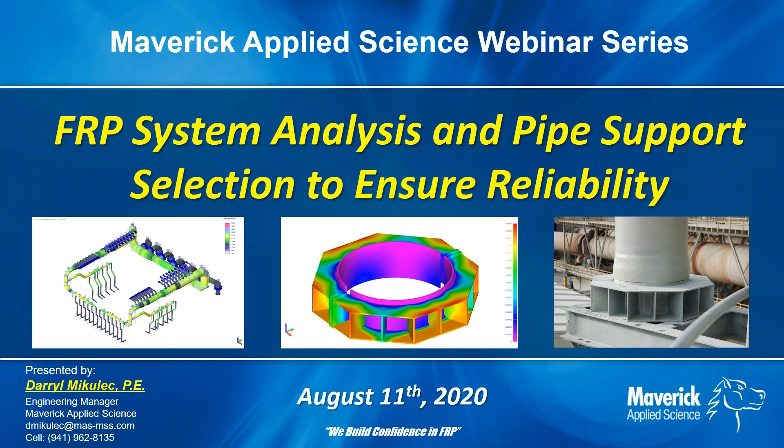Today's topic is a little more technical. We're going to talk about FRP system analysis and pipe support selection to ensure reliability. So let's get started.

I think you should know a little about me so you understand where I come from and some of my credentials. I've been with Maverick since 2006, going on 14 years here, and I'm now the engineering manager of Maverick.

Some of what we do at Maverick with our engineering capabilities: we do pipe stress analysis, equipment design, FEA. We develop project specifications and owner specifications specifically for non-metallics. A lot of owners don't have those in-house, so we assist with that. I also manage the pipe support division, so we have our own line of custom pipe supports specifically intended for FRP and thermoplastic piping.

Some of our other engineering responsibilities include acting as the owner's liaison. We assist with bid reviews, calculation reviews, and design reviews to make sure they meet specs and all relevant industry codes and standards. Owners don't always have those technical subject matter experts in-house, so we act as owners' representatives in those instances.

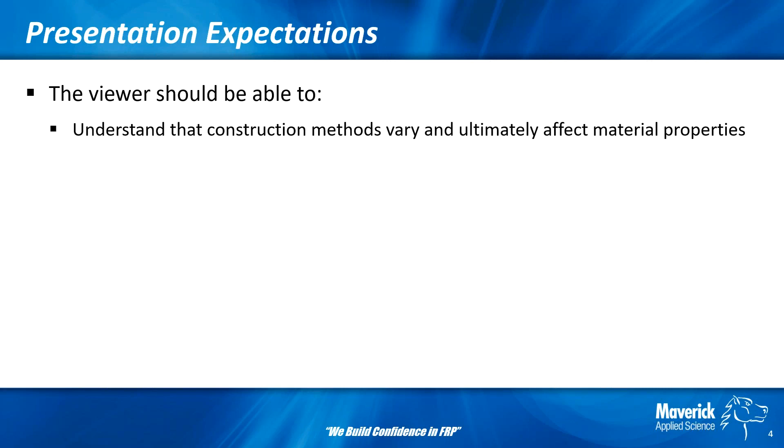I'm expecting attendees to understand that construction methods vary and ultimately affect material properties with FRP. You should know some of the primary differences between analyzing steel and FRP. I expect a fair amount of attendees here have good experience with steel, maybe not so much with FRP.

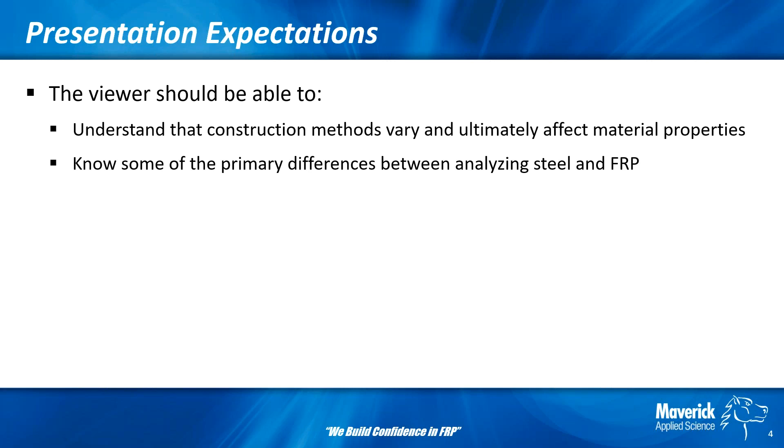You should be able to identify different analysis approaches based on what system routing you're given and what kind of design conditions you have, whether it's high temperature, low temperature, or high pressure.

You should understand some of the gaps between theory and reality. That's a very big gap. Everything looks great inside a computer, but when it's operating in real life, theory is not always reality, and the analyst is responsible for overcoming that.

Finally, you should know what separates appropriate from inappropriate supports. That'll be the end of the presentation here.

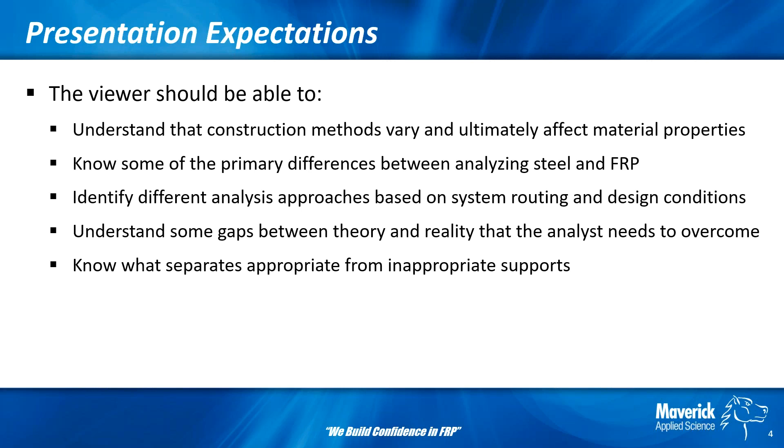Now, I do not expect to teach the attendees how to use Caesar. Caesar is a pipe stress software—basically the Cadillac, we say—so I will be referring to Caesar throughout.

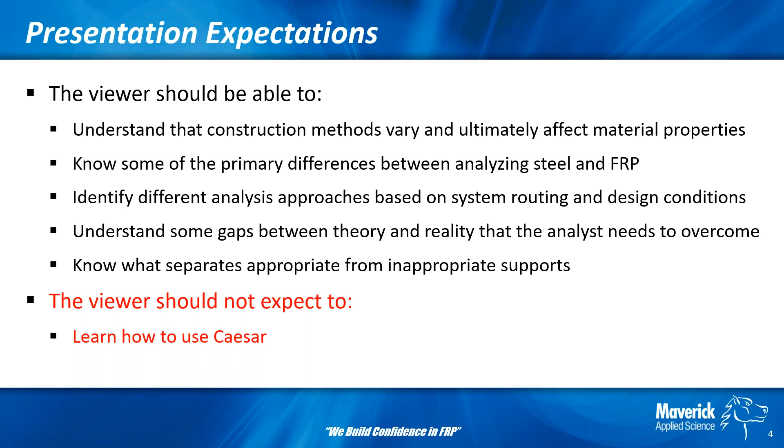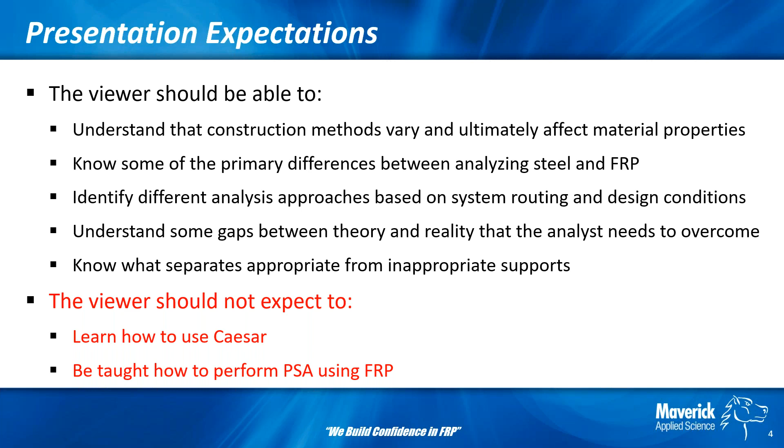I'm not going to teach you how to learn Caesar, and I'm not going to teach you how to do pipe stress for FRP. That's not the goal of this presentation. So any questions related to Caesar configurations or modeling questions specific to different pipe stress softwares, I probably won't answer those. It doesn't mean I can't talk about it offline, but it's not something I hope to educate on in this webinar.

My assumption is that most attendees know what pipe stress analysis refers to, but for those who aren't familiar, I want to establish this so we're all on the same page. Throughout the webinar, I'm going to refer to pipe stress, PSA, and Caesar interchangeably, so just understand that.

So what is pipe stress analysis? It's a calculation method to predict combined axial stresses in piping and loads on supports and equipment. It's an iterative solution technique to help optimize the most efficient pipe routing, dimensional requirements, support locations, and types. The program does not do everything for you, it's just quicker than doing it by hand like they did 50 years ago.

The analyst still needs to add all the inputs, do the routing, material properties, figure out support locations, and iterate on their own. It's still a very manual process. You don't just plug it into the computer and have it do it for you.

But why is pipe stress important? Specifically for me, and for what I'm going to talk about here, why is it needed for FRP? For FRP, it's a non-ductile failure mode. You don't have any warning. So you need to be certain of the stresses within your system, the displacements within your system, and make sure everything is properly managed.

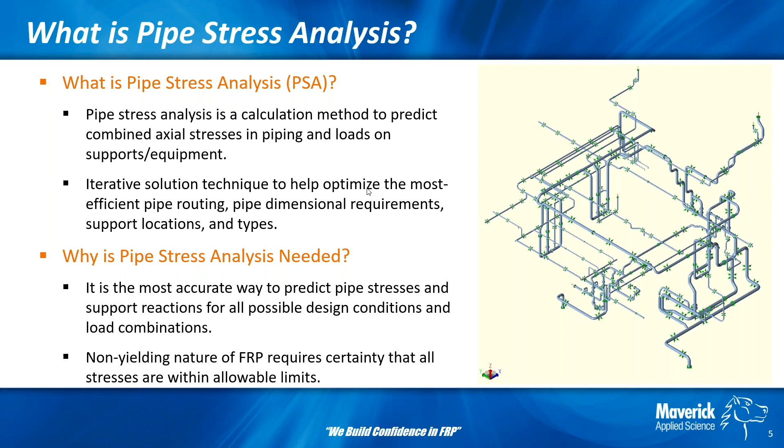So we'll first go through things to be considered. This is not a unique approach, not just FRP, but being aware of these considerations and how FRP relates to these different aspects prevents oversights from happening. You need to understand the product, the material you're inputting, the system geometry, design conditions, and finally load cases and combinations. I'm going to talk more about thermal expansion and low modulus in future slides.

As far as the material, you have to understand there are different construction methods. You can't assume one construction method or one customer's product line. Pressure ratings can be different, thicknesses can change, stiffness changes, properties change, allowable stresses change. It's not one size fits all.

With a joining method, whether it's butt wrap, socket adhesive, if you don't understand these completely, I don't have slides specifically on what these joining methods are. I'd be happy to field questions on those later or after the webinar. But the joining method matters - socket adhesive are very quick to assemble, but they're not as good in bending.

There are currently no weld efficiency factors for FRP. I can say that Maverick is currently working on it through an ASME project, but we're not there yet. So you have to understand the joint system and how that can affect the hotspots in your system.

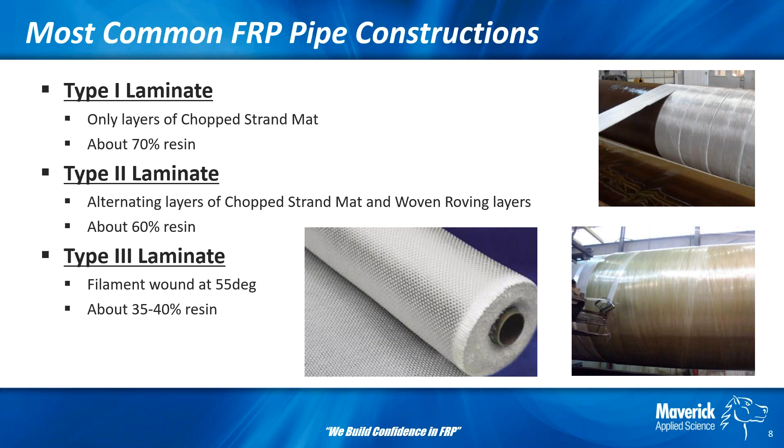And then type 3 is kind of a new designation in our new standards, but it's basically 55-degree filament wound pipe, a very optimal wind angle. This is the strongest, the most controlled, so it's about, I would say, 60 to 65% glass.

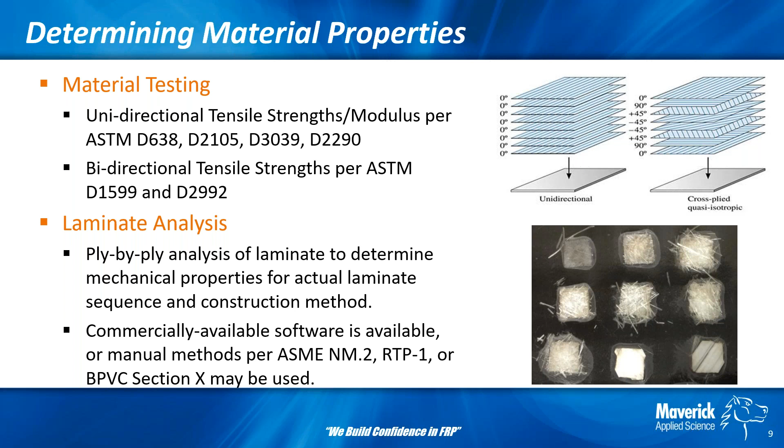You can determine each of these by two ways. Really material testing, where you just destructively test. You see the different ASTM methods displayed there. There are pros and cons to each. Or you can do theoretical laminate analysis, using commercially available software, or any real ASME FRP standard also has methods.

So in talking about tensile modulus, you see kind of the wave in this graph. The value on the far right is a Caesar default. If you don't know anything about FRP and you just know you have to analyze FRP, you might just use 3.2 million modulus. Still a lot more flexible than steel, but compare it with 8 other product lines.

If you just go online and look at different fabricators and their product lines, they advertise these different modulus values. So which one is right for your system? You can't just plug whichever one you want, because a lower modulus means it's more flexible, more forgiving, which could also be unconservative. If you use stiffer, you think you can go longer spans than you really can.

I'm going to take this time to briefly introduce NM2 and NM3 that I've been talking about previously. I'm not going to go into too deep an extent about this. There are plenty of ASME webinars out there, great webinars given by very technical people that explain it very well. It's a new pressure piping standard. We may do a webinar in the future on it as well.

Basically, what viewers need to know is there's some of the gap filled with NM2 and NM3, where there are stock properties in NM3 for FRP type 1, type 2, and type 3 laminates. So you don't have to do all of this guesswork. You can just use a stock value, but it will be conservative. And that also goes for allowable stresses too. People would be happy to note that there are allowable stresses published in NM3.

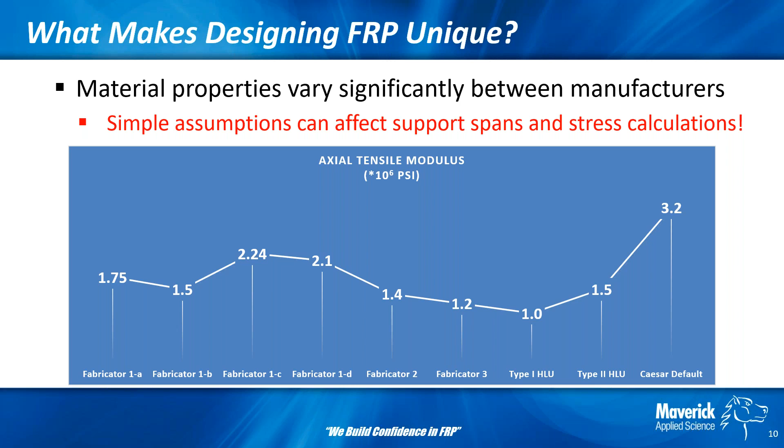Thermal expansion. This is a very big deal for FRP compared with steel. The bar on the left is for type 1. So the resin is what expands, so you'd expect type 1, with the most resin content, to expand the most. It's important to note here, you have 3 different construction methods and 3 different thermal expansion coefficients. So it's crucial to know which one you are using in your analysis.

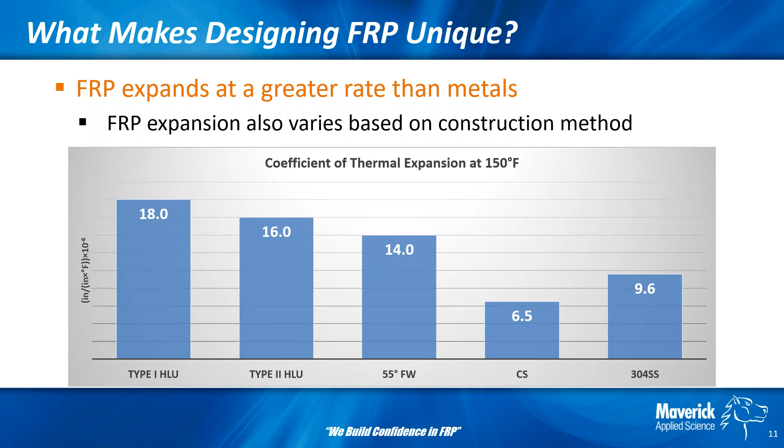The main takeaway from this is obviously the coefficient of thermal expansion changes between products for FRP, but also compared to steel. Just looking at carbon steel, you're anywhere about 2 to 3 times that of what steel is. So here's a general example. When we see systems operating at 160 in the FRP industry, to me that's an elevated temp. To somebody familiar with steel, they think 160 is pretty low.

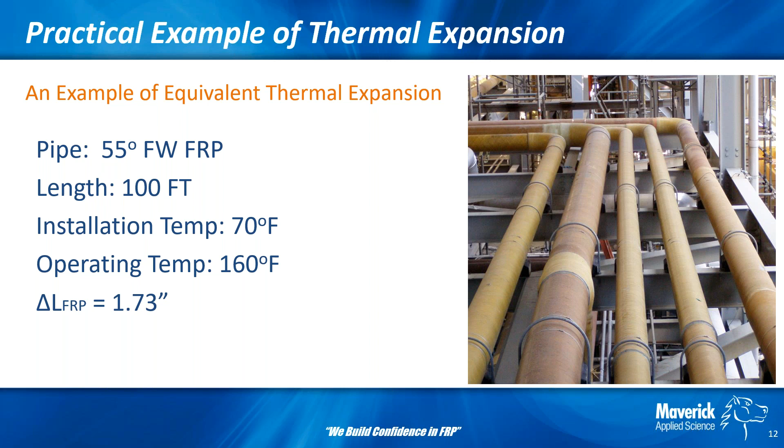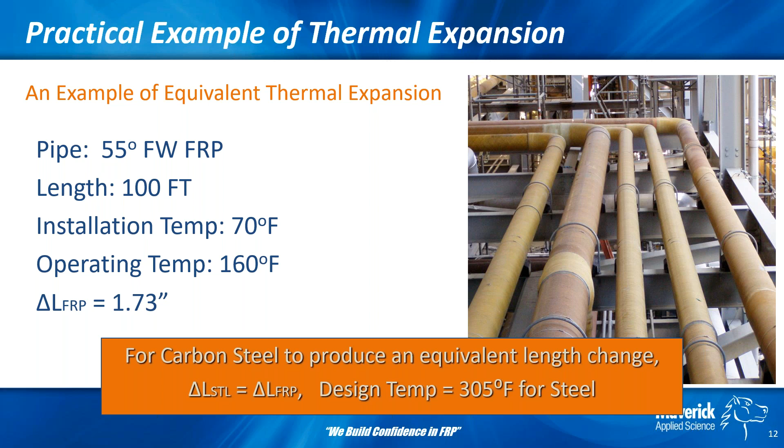So we just do a quick example here of a 100-foot length of pipe based on a delta T of 90, 70 degrees being the installation temperature. You get a growth of almost 1 3/4 inches in that system. To get 1 3/4 inches of growth for a steel system, that's the equivalent of a design temp of 305. So when you present a 305 degree Fahrenheit design temperature for steel analysts, they start to think their system is a little bit more sensitive and might need a formal stress analysis.

The other big item to talk about with FRP, and why it's crucial to analyze and understand what you're dealing with: it's a non-ductile material. You can hear that as brittle if you want. Brittle doesn't sound good, so us FRP guys say it's non-ductile. But you can see with these elongations here why it's so critical to manage stress in FRP. There's very little warning if FRP breaks. So you need to stay within that box of allowable stresses.

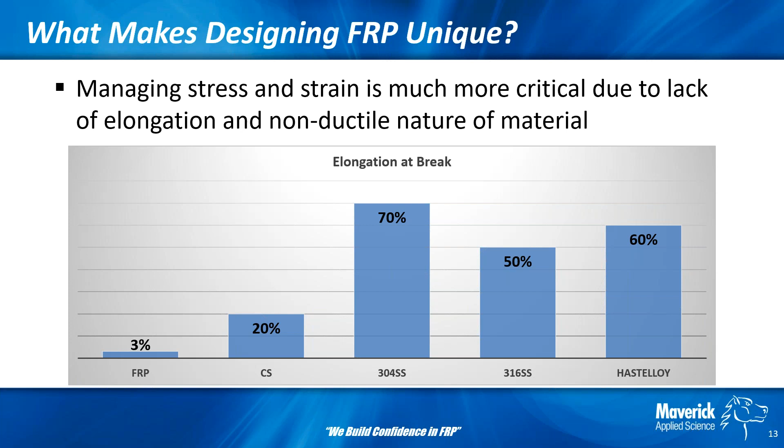It's unfortunate, and I would say it's unnecessary because we know a lot more now than we did 15, 20, 30 years ago. We have good standards in place. It's a science. But these failures happen when displacements and stresses just aren't properly managed.

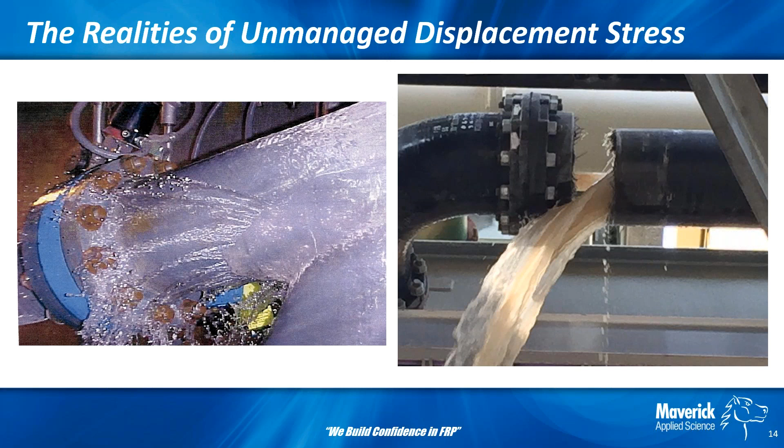Getting back into the considerations here, just talking about geometry, you need to understand the routing and how flexible it is. I have later slides comparing a few different common analysis methods for FRP systems based on how flexible they are. Where are your inline components and how heavy are they? Spans may need to be shortened if you have heavy inline equipment.

Where are existing supports? Do you know of any locations of available steel if you need additional supports? If you're replacing an FRP or a steel line with FRP, the spans are probably a little longer, so you'll need to identify intermediate steel. Take note of any stiffer locations. You want to put anchors at your stiffest locations so they can handle the reactions imposed, without flexing while operating.

And then finally, understand the connections. Are you connecting to a pump? A steel tank, an FRP tank? What are the stiffnesses of those connections? Are they rigid? If it's an FRP scrubber vessel, you might have a nozzle 50 foot in the air. If that vessel is operating at 200 F, 50 foot in the air, you can bet it's growing a fair amount, so you need to include that initial displacement as well.

The design conditions ultimately affect the complexity of the analysis. It's not just the routing. Conservative assumptions will affect the cost. It's important to note, and this is clear in NM2 now, that when you see pressure and temperature, you need to analyze at the operating pressure and temperature, not the design. It's pretty common for specs to just say 150 psi, 200 F, but that's more for pressure rating and resin selection. That is not the operating conditions.

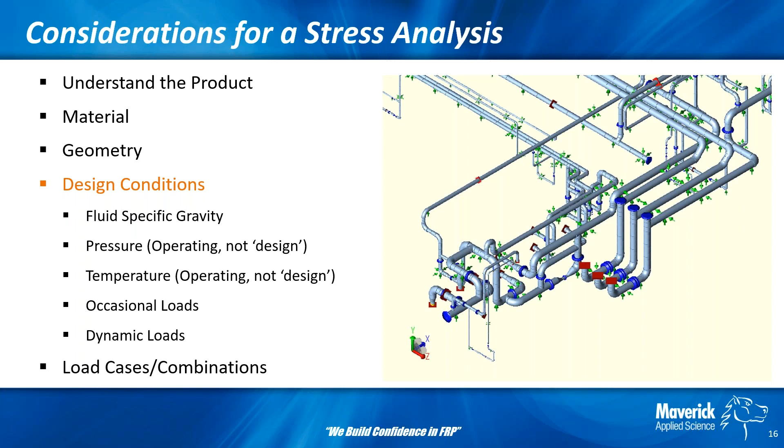I'm not going to talk too much about surge analysis and dynamics. Surge analysis is not common in our world. If you have a worst case surge event, you're going to blow up your FRP pipe. The operators need to implement engineering controls to reduce surge as much as possible. There are fundamental support layout guidelines, including anchors at each change in direction, which help to mitigate any minor surges.

What I'm showing here are recommended minimum load combinations. There are more, and it depends on what your system is. I always say dead weight plus pressure is a very good place to start. If you have elevated stress in this case, adding temperature certainly will not help your system. It's not going to make it lower stressed.

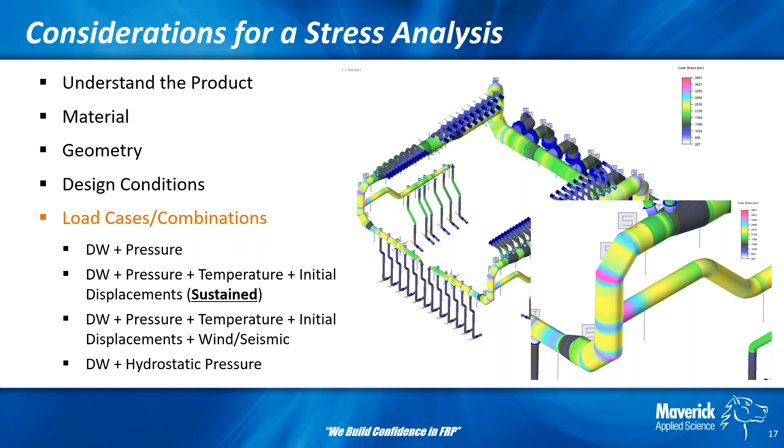So higher stress in dead weight plus pressure tells you that you might need more supports. Maybe your spans are too long. Maybe you need a support in your riser piping somewhere. It's crucial to note that temperature is a sustained case. It is not an expansion case.

The million dollar question here: what is the allowable stress for my FRP piping system? Well, I've probably said it a few times here, there's no one size fits all answer, although NM3 now provides guidance, but it will be a conservative position. I'm not going to go into all of how NM2 and NM3 define allowable stresses, but just know that there is something there. Before NM2 and NM3 existed, we would have to select our allowable stress based on construction method, it changes, type 1, 2, 3, or custom.

What is your loading? Do you have expansion joints in your systems, or is it bidirectionally loaded? That affects the stresses in the pipe. What kind of material testing has been performed? How confident are you in the ultimates? And what are the service and fluid conditions? You might be a little more concerned if you have HCl going through your pipe, or chlorine dioxide, or wet chlorine versus seawater.

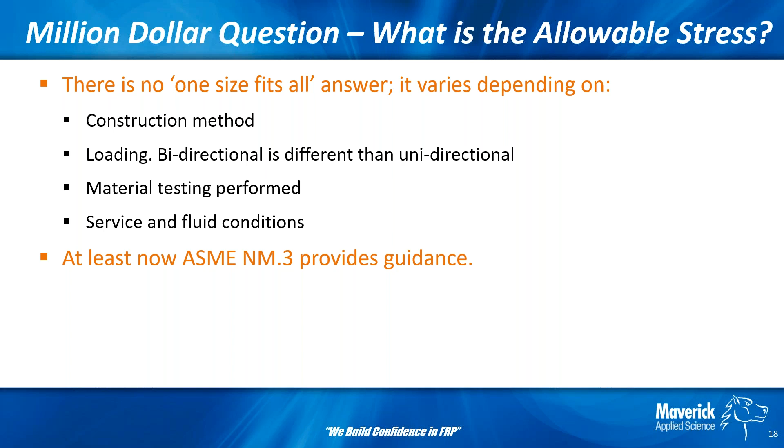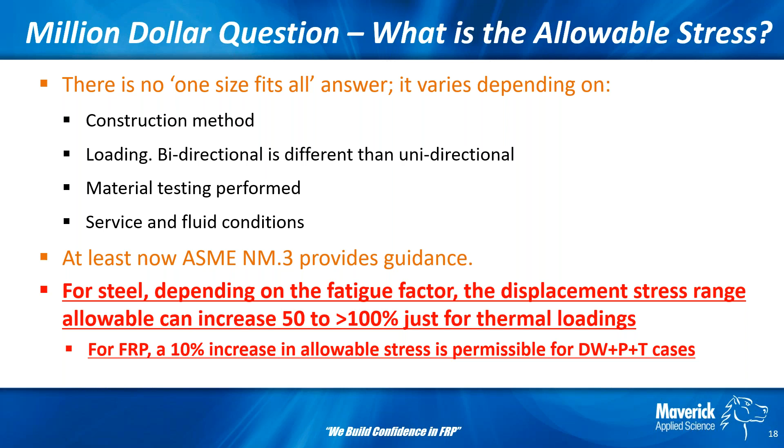For steel, however, depending on the fatigue factor, you can have a displacement stress range allowable increase of greater than 100% just for thermal loadings. For FRP, and this is only recently, before NM2 came out, it was 0. But with NM2, we have now allowed a 10% increase in allowable stress when you analyze dead weight plus pressure plus temperature. So it is not just for a thermal case, it is for what we call a sustained case of dead weight, pressure, and temperature.

Showing another graph here of the variability you'll get between different manufacturers and construction methods for ultimate strengths. It's all over the map.

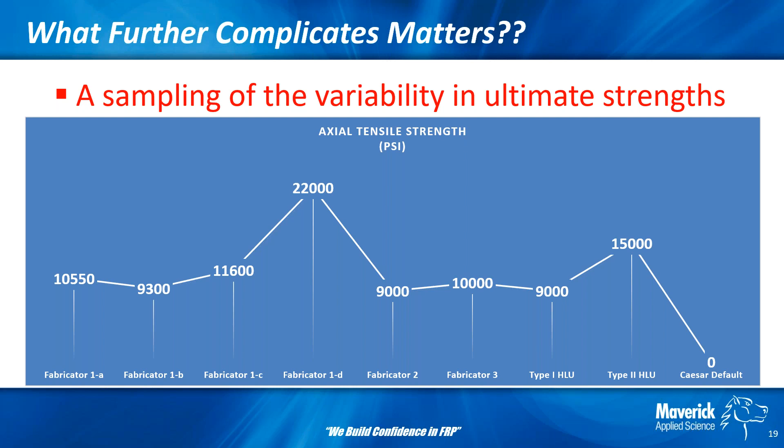Caesar, as it should, doesn't give a stock value, which I know drives a lot of you guys nuts because we get that question fairly often. I know fabricators and manufacturers get those questions as well. Now, after seeing these, how confident are you that you know what the allowable stress should be if you're not familiar with each of these products?

Well, this is what can happen. If you overestimate the allowable because of unknown product, you could have a stiffer product, more flexible, stronger, weaker. If you include an expansion stress allowable as a secondary stress, not a primary stress, or miscalculate SIFs, that can really hurt your elbow system. And it really doesn't give you a good picture if you're using wrong inputs in your analysis.

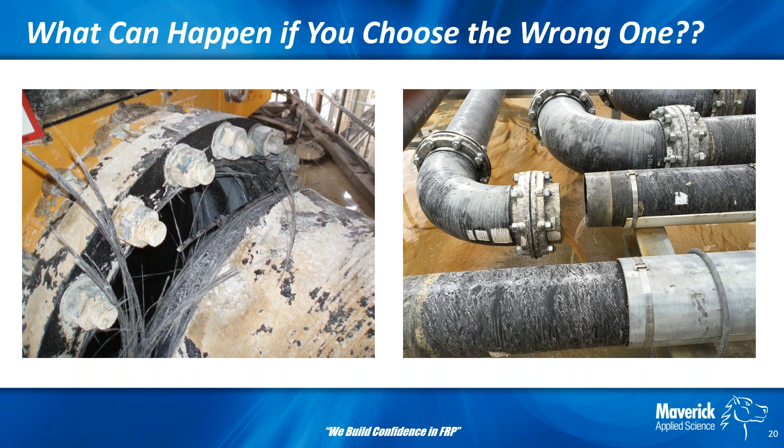So when should we analyze? What are Maverick's internal rules for when we would say a formal analysis is required? Some systems are so basic that you can just throw in an anchor here, a guide support here, a couple dead weight supports there. To us, when we see a system over 50 PSI and significant temperature swing, that would tell us it's something that you might want a formal analysis for.

ASME NM.2 does provide some guidance as well, but I'm just kind of sharing what Maverick does here. So if you have significant wind or seismic concerns or any kind of complicated combinations of these design conditions, that would warrant a formal analysis.

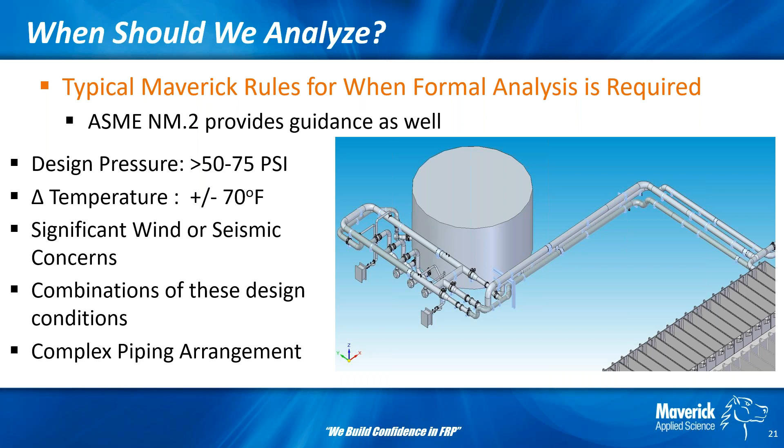Or if you have a complex piping arrangement. So what do I mean by a complex piping arrangement? Well, FRP doesn't just carry water all the time. You carry harsh chemicals. So if you have something that is very critical, you're going to want a formal analysis. I would consider that system complex.

If you have many fittings, if you have a lot of twists and turns, if you have large diameter and low stiffness - so that picture on the bottom right with larger diameter elbows with short offset lengths, that is pretty stiff. Even though FRP is flexible, that is a stiff system because of the large OD on that.

So if you have limited natural stiffness in your routing, if you have a header with several branches coming off and a lot of thermal expansion, that's going to be a problem.

Riser piping - it sounds weird to say that riser piping could make it complex, but if you have a long rise, that's a lot of thermal expansion that you have to direct somewhere. It lifts off supports, it binds up other supports, or it binds up elbows. So I consider riser piping pretty complex.

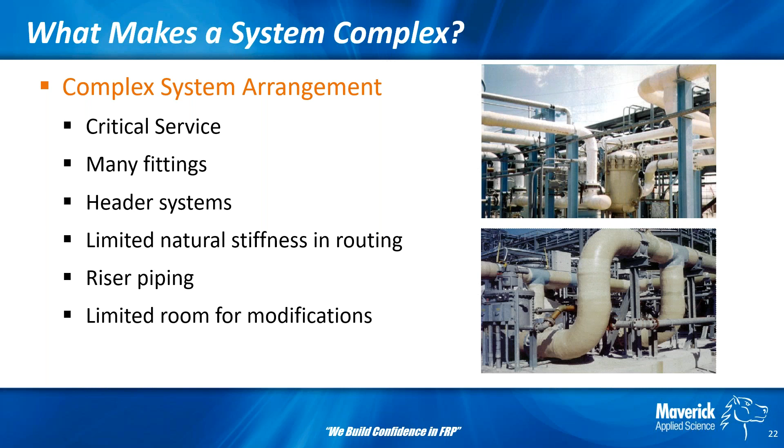You would want restraints in all directions. Static analysis does not capture surge and fluid momentum effects. It does not know that when you turn on that pump, you get a pretty good slug going through there and knocking that elbow and shifting your pipe. So every change in direction needs some sort of a restraint.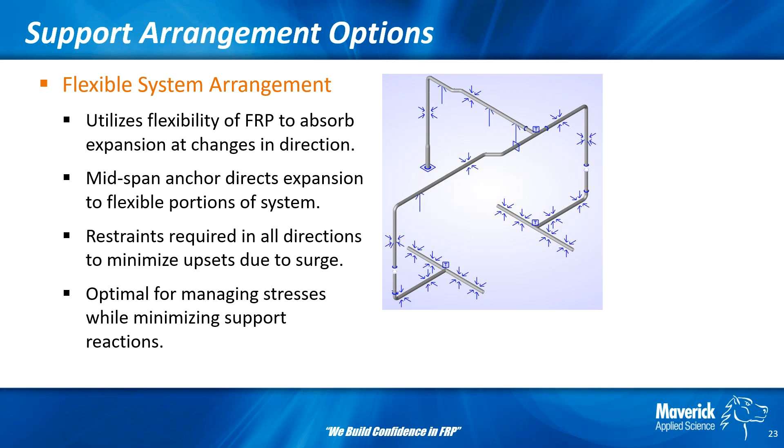We don't like free floating systems where it's no anchors and just kind of slides everywhere. It looks great in your pipe stress software. In reality, not so much.

This is the optimal arrangement for managing stresses, minimizing support reactions, so that it is preferred. The picture on the bottom right shows if you have room to do expansion loops to absorb expansion, if you have more of a long straight run that you need an expansion loop.

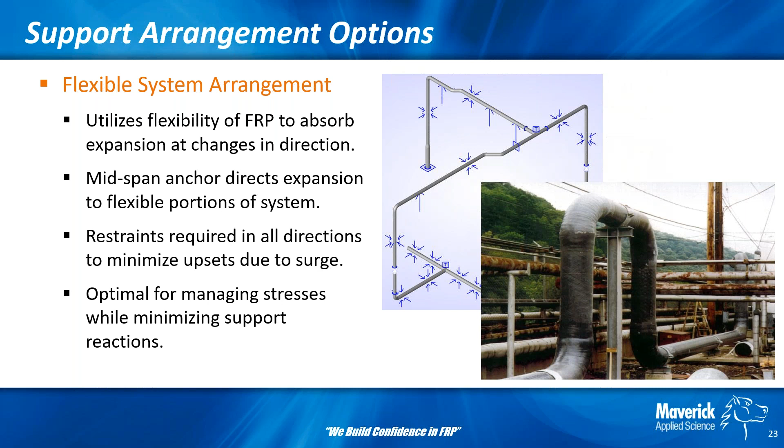But honestly, expansion loops are not always possible. They're expensive, they require more fittings, more space, more structures, more supports. It's not always possible, so sometimes you just need to go with the expansion joint solution.

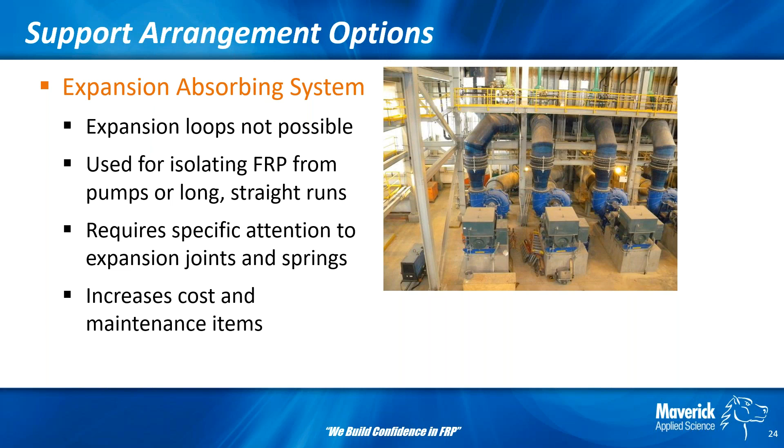Not always preferred. You have to decide, do they need to be tied? Do they not need to be tied? I'll say expansion joints make a lot of sense on pump outlets to prevent vibration from pump being transferred to FRP because of the non-ductile nature of FRP failure.

But expansion joints are not a one size fits all. Sometimes you have no other choice, you have to use them. If you have high pressure systems though, now all of a sudden you have an open end and you have to deal with that thrust. So that's why you have to decide, do you need tie rods or no?

Hot and cold cases affect what your tie rod gaps need to be. And you need extra supports to do this. It's increased maintenance items, it's increased costs to do expansion joints. So it's not the first solution.

An older method of supporting FRP pipe that is still sometimes used today in certain situations is a restrained system. Basically, you anchor each end and protect the fittings, keeping the pipe in compression. It's fairly strong in compression, so this is really used for long straight runs.

Rule of thumb, I'd say somewhere around 300 feet between anchors. So if you had a 600 foot straight run of pipe, you might need 3 anchors in that run. Now, that middle anchor in your pipe stress software will show up with very low loads because it's balanced from the anchors on the outside.

That is not really the case. If it's not installed perfectly in line, if the shear collars have a little bit of a gap, or if there's flexibility in your structures, you're going to share a little bit more of that load. So don't trust an anchor that shows zero load in a restrained system.

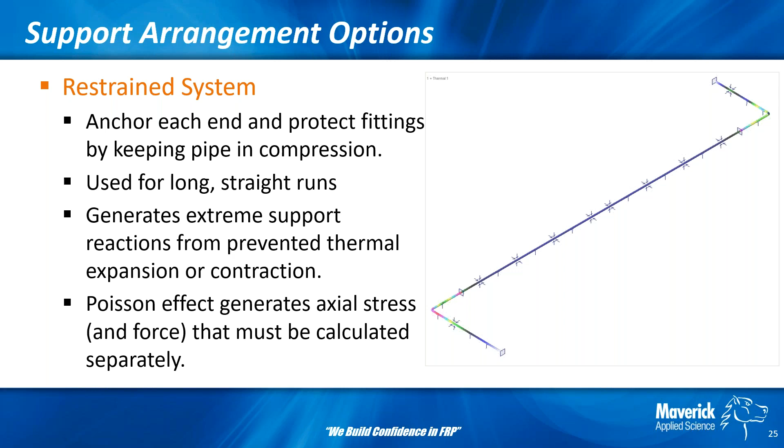You should also know that when you do a restrained system with any temperature change, you're going to deal with a lot of thermal force, whether from expansion or contraction. It sounds really good in theory, but when I present a customer with a 50,000 pound load that they need to design their structure for, 30 feet in the air, they decide that maybe an expansion loop or expansion joint is actually the way to go.

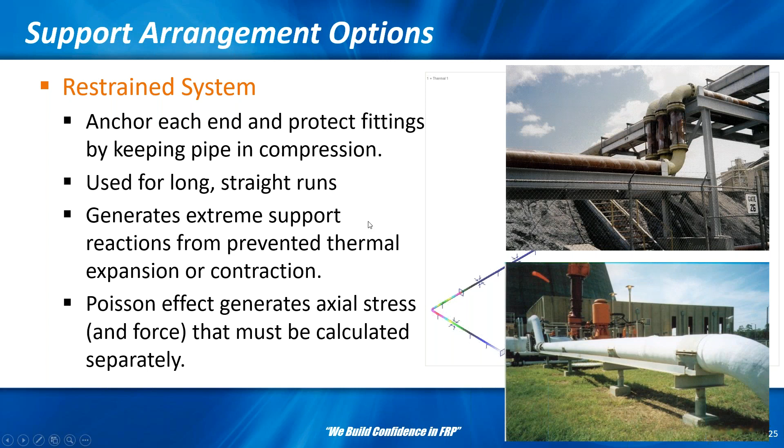Okay, stresses are managed, everything's optimized, you're all done, right? Well, not quite. What are you connecting to? What are the equipment loadings? Unfortunately, and this isn't just with FRP, there's a disconnect between piping and equipment.

Tank designers don't want to deal with pipe, and pipe designers don't usually want to deal with tanks. Tank designers design their reinforcement pads on their vessels for their loads only - they do not want to take any more loads. They'll say you need an expansion joint at every nozzle, and I'm sure some of you have dealt with that before. Well, I've already brought up the issue that expansion joints aren't always the perfect solution. So that complicates matters a little bit, and you're talking about extra supports and extra cost.

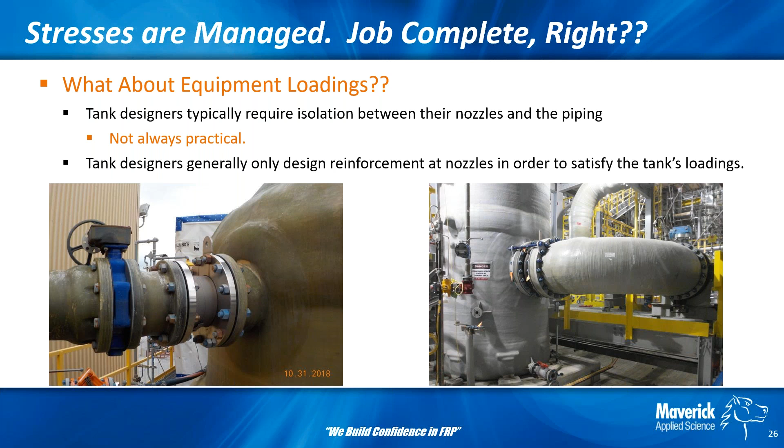I'm going to talk more about this in a separate webinar most likely, but I want to show this example just for awareness. Consider this example: we'll use 6-inch FRP pipe, a pretty standard size, and we're going to consider temperature and deadweight loads.

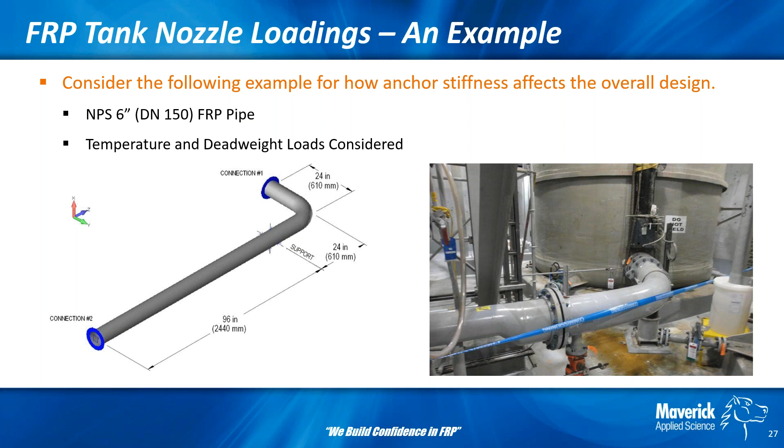It's a pretty common arrangement. If we assume the anchors are rigid, which in Caesar would be something like 10 to the 12 pounds per inch, very, very stiff. The stiffer the connection, the more load it carries. So that moment on that connection - if you give that to the equipment designer, they're going to laugh at you and say you need an expansion joint.

For the pipe stress analyst, they're going to see 5,000 PSI stress and think it's horrible because the pipe is bound up - it has no flexibility to rotate around that connection point. So the inexperienced analyst is going to require expansion joints or large repads on the tank. You're going to have additional supports, and you're also going to need to manage that thrust as well.

If you assume a reasonable stiffness - now we've done studies on this, I'm not suggesting you use 10 to the 4 across the board, don't hear me say that - but usually 10 to the 4, 10 to the 5, 10 to the 6 gets in the reasonable magnitude for FRP. If you use a reasonable stiffness, your moment goes way down, your stress goes way down, about 8 times less, and I'd say that's acceptable, all by using realistic assumptions.

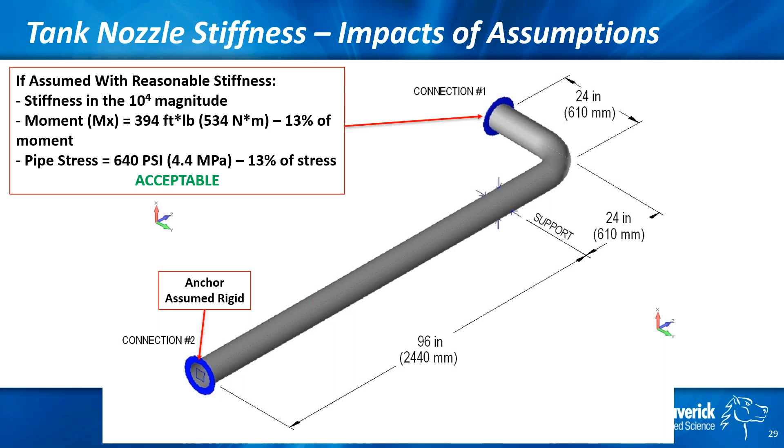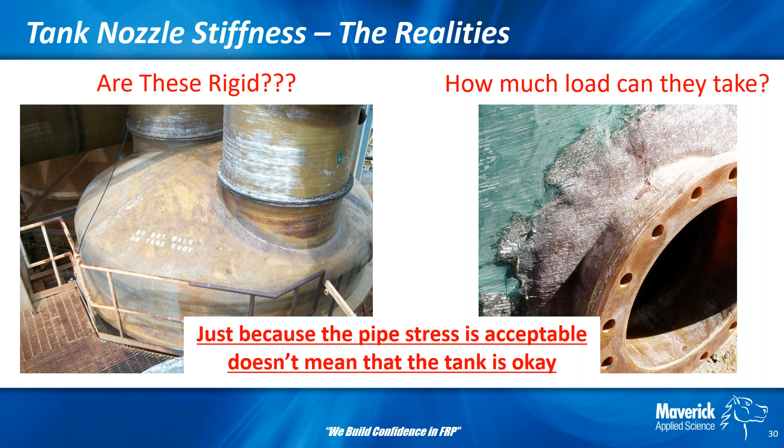Are these rigid? In the left picture, you can't see it, but it actually says 'do not walk on.' So if you can't walk on it, I'd venture to guess it's not very stiff. Smaller loads can present problems with these nozzles - it doesn't need to be a high load to cause concern. Even 300 foot-pounds, 400 foot-pounds could be a problem on these nozzles. Just because the pipe stress is acceptable does not mean that the tank is okay.

So we're going to transition now to talk about pipe support selection. We're still going to talk about pipe stress because there is some give and take there. So your analysis is complete, you have the support types defined, you know how your system needs to be optimized to run well. But what do we actually know about what pipe stress tells you?

Well, this is what you're going to find out. Really, the only hoop stress you're going to find out is just from pressure alone, just basic cylinder equations. All of the rest are axial stresses, torsion stresses, some sort of combined axial stresses. And this makes sense because pipe stress software is one-dimensional. It's beam theory. It thinks the pipe stays perfectly round. Well, we know from slides before with low flexibility that that is not the case with FRP.

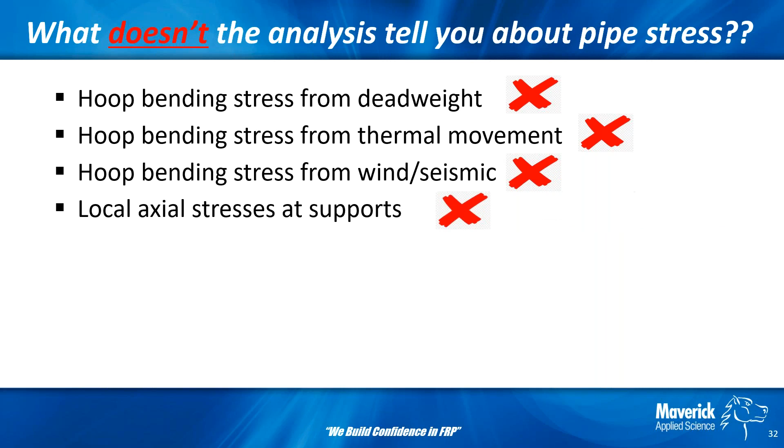So what doesn't pipe stress tell you about the actual stresses in the pipe? You're going to see a lot of these with hoop in them. A lot of the hoop bending stress, like I said, it doesn't oval in your pipe stress software, but it might in real life if you don't have the proper supports. And all of these other stresses you're seeing at supports in Caesar, in CAEPIPE, all of your supports are perfect. There's no extra stress. It is just based on beam theory alone.

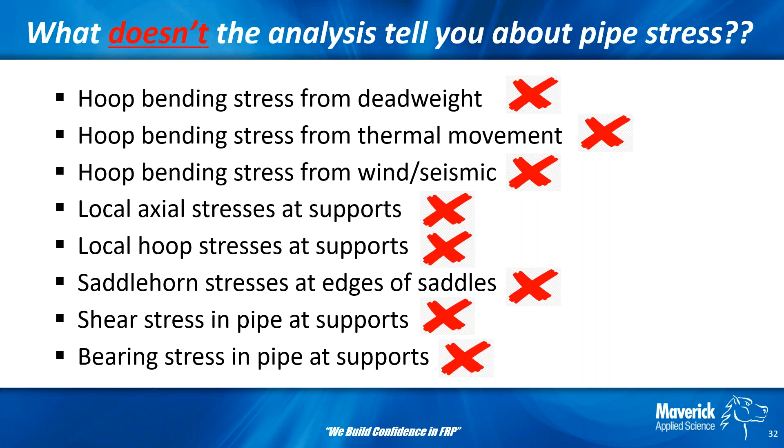So now where's your confidence level that pipe stress can be done by anyone? Can you just throw in supports you find the quickest off the shelf? Selecting the right supports means just as much as performing the pipe stress. And I say this a lot, if you can design the best system in the world, but bad supports will absolutely negate it.

Just a brief slide, just so you know some of the more common types of supports that you'll find in FRP systems. Slides, one-ways, guides, restrain it perpendicular to the pipe. Anchors are fixed points that direct expansion. And then there are other styles too that you can optimize your gaps if you need a little bit more flexibility, if you have more expansion in your system.

You can base mount it, hang it. Riser piping often needs supports. If it's a pretty tall rise, sometimes you just need to flange mount it based on constraint issues or lack of room.

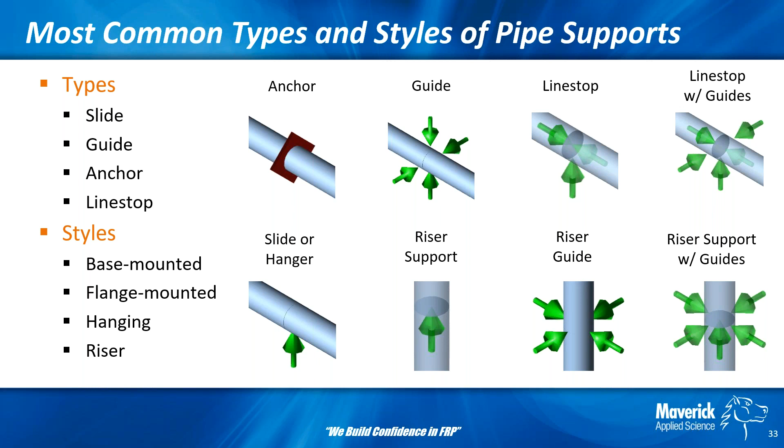I'm going to finish here with talking about the purpose of pipe supports, specifically for FRP. Why do they have to be special and not just off the shelf? The supports on the right are their Maverick supports. They look robust, maybe too much, some might say. I've heard somebody say they have been called boat anchors before.

So why do they need to be as wide and stiff as they are? Well, one, you need to prevent point loading. Mentioned this a few times, non-ductile, brittle failure. You cannot point load a brittle material. And you also want to minimize abrasion. So you see in that bottom picture, you see the rubber-lined supports. You cannot put FRP in contact with steel. The steel will win when it wants to move.

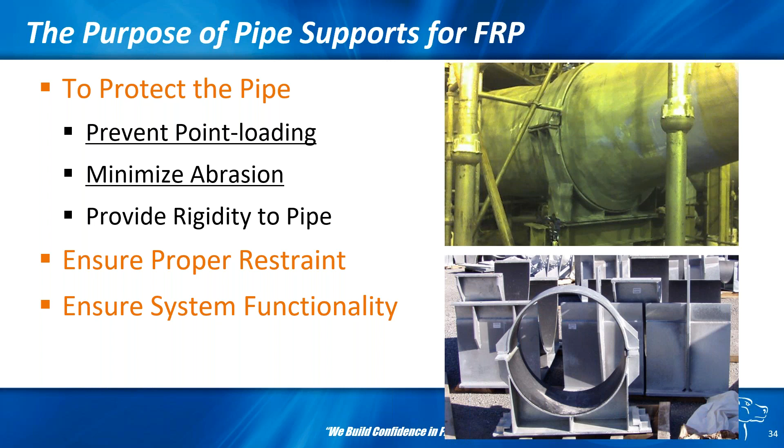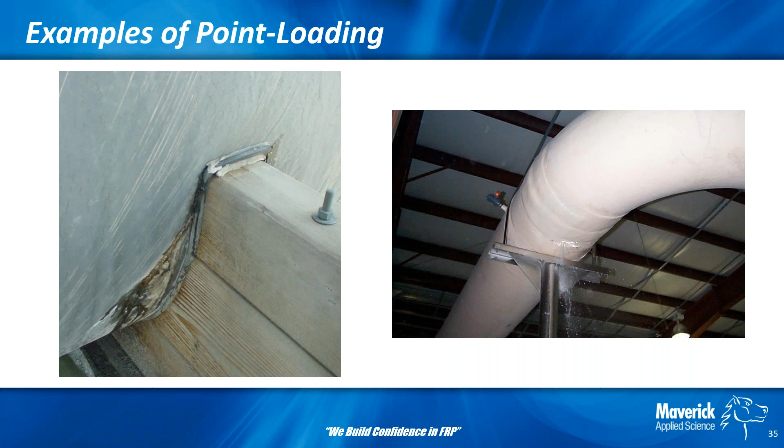Here are some examples of point loading. The narrow supports will pinch the pipe. Take note of the wooden support, I'm going to come back to it a little bit later, or I'll at least reference it. The one on the right, it's a guide. So in stress analysis, you put a guide, you think it's the right support. Well, if you put the wrong guide in your system, you're point loading the pipe, you get some shear in the bottom, and ultimately you get a failure.

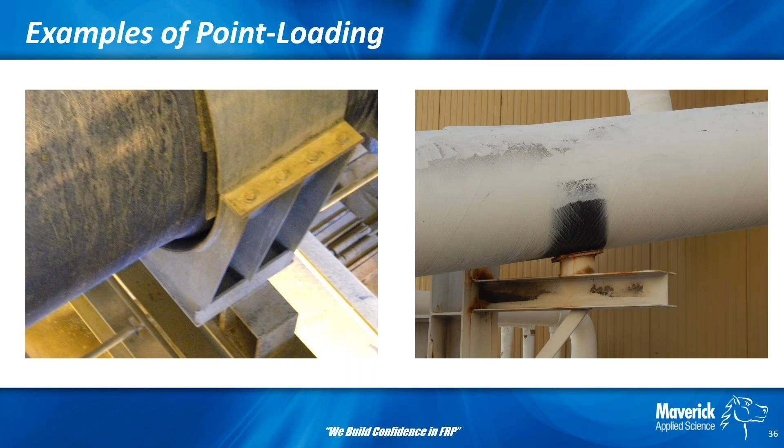If you have the wrong OD, if you have a support too close to a joint, now you're point loading the pipe again. If you have system movement, the picture on the right, obviously there was a shield there at one point, but improper restraint caused movement, probably shook off, walked off, and now your pipe is point loaded. It's not supported properly anymore.

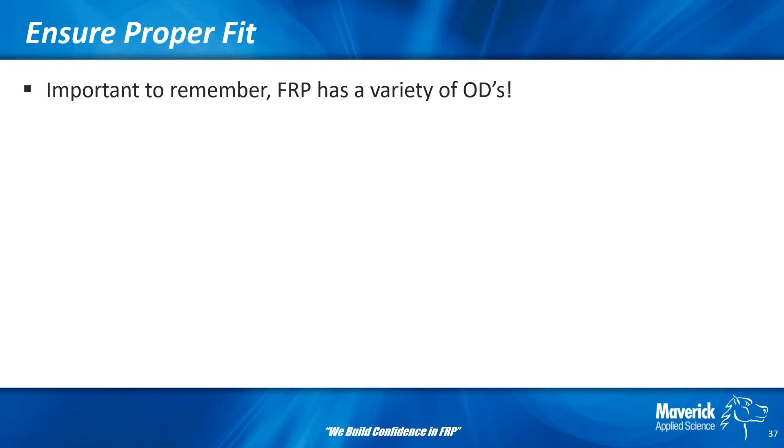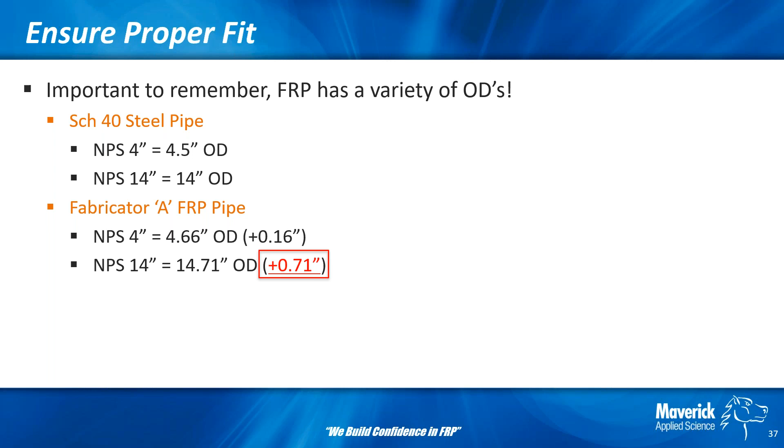So just remember, FRP has a variety of ODs because of pressure ratings and strengths and properties. It's custom, it's great, but you have to understand how to deal with that. Steel is pretty easy, you know what you're getting. You know the ODs of a Schedule 40 steel pipe. Just look at one manufacturer's pipe, their 14-inch pipe is 3/4 greater diameter than the 14-inch steel pipe. Another fabricator is even more than that, 7/8.

So how often have you seen these types of supports to solve the problem? Instead of building it custom because they didn't think about supports quick enough and they just bought some off the shelf, well, they knew they couldn't go with the 14-inch support, so let's just go with the 16-inch support and have a huge gap and it's just improperly supported.

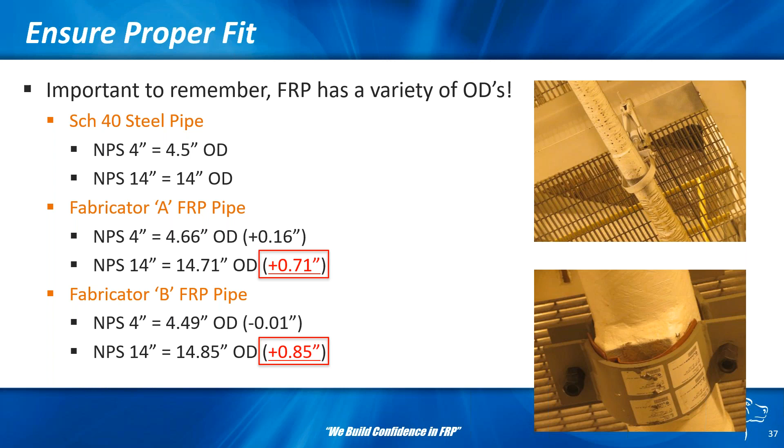So this is the reality. This is a research project we did that tells you why point loading is bad. Other than me telling you all day long and showing you failures, this is the reality. This is the theory that goes into the reality.

This is a separate webinar, but I just want to show you for illustrative purposes - I modeled this in pipe stress software and also in FEA. What we want to do is compare a 4-inch pipe with a shield, pictured on the right, versus the shield walked off and the pipe directly on the steel.

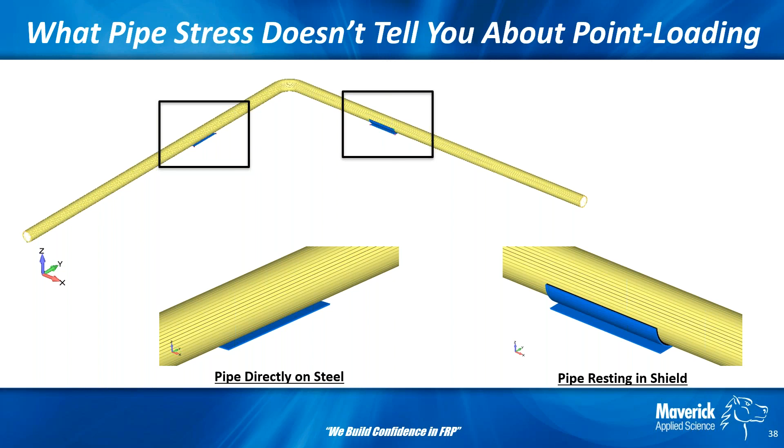The blue bar is Caesar - it's a perfect support, remember. The red is the point loaded directly on the steel, and the green is having a shield for a 4-inch pipe. The main takeaway is we're looking at hoop stress here. Remember, pipe stress doesn't really tell us what hoop stress is, at least when it comes to bending.

Caesar thinks it's 0 when you're just looking at dead weight because it's a perfect support, whereas pipe directly on steel is already carrying 622 PSI of stress. When you add pressure, the reality for this support is 40% higher for a dead weight plus pressure case if you put that pipe directly on steel. If you have a proper support, the stresses increase negligibly. Nothing is really perfect as theory would predict.

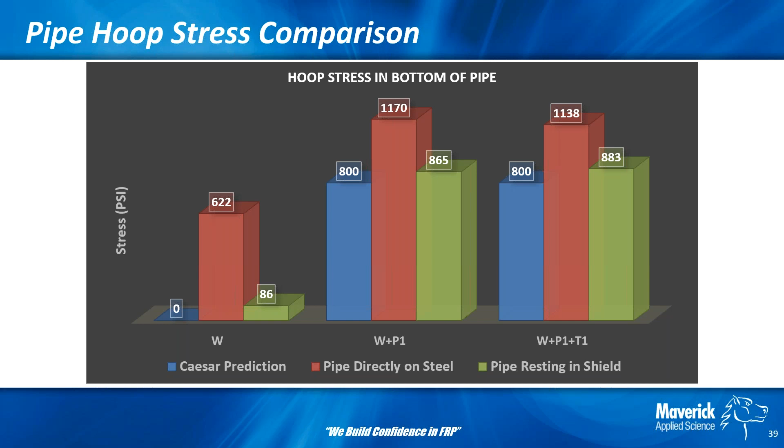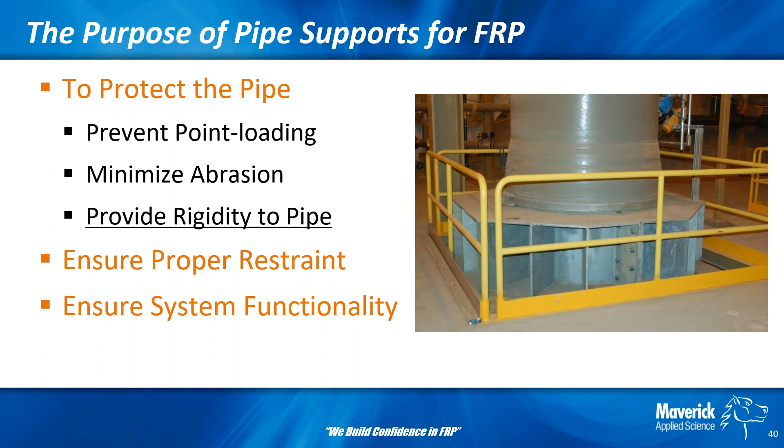Hopefully point loading is clear to the viewers here. Now, supports need to do what they're supposed to do - they need to support the pipe without stressing it. Seems simple enough, right? So here's another investigation: pipe stress versus FEA.

Whereas the previous one showed a 4-inch pipe, we're okay with shields there because it's a stiffer profile, smaller diameter. What happens when you get to 18-inch pipe? That's a little more flexible, with a different diameter-to-thickness ratio. So I wanted to look at this to understand why - Maverick's catalog stops at 12-inch. We don't really want shields on larger pipe or duct without further evaluation.

Shields, again, for 4-inch, okay. For 18-inch, not so much. You might be asking yourself, why does it matter? Steel is very strong - we've already talked about it being stiffer and stronger than FRP. Why do we need wider supports? Why do we need a full cradle? Why do we need full clamps? Would you expect to see any notable differences between these two types? Well, I wouldn't show them if there wasn't a notable difference, so let's look at it.

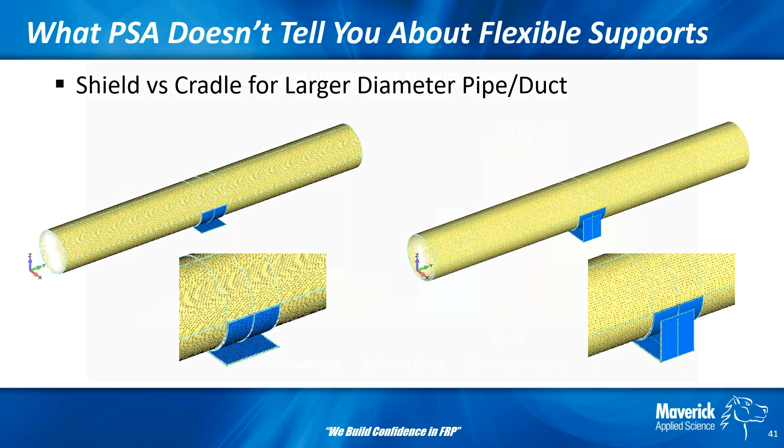Remember that wood cradle support I mentioned before? That's a classic example of saddle horn stress failure because of poor supports. In that case, it was because it was too narrow, not because it wasn't fully supported underneath.

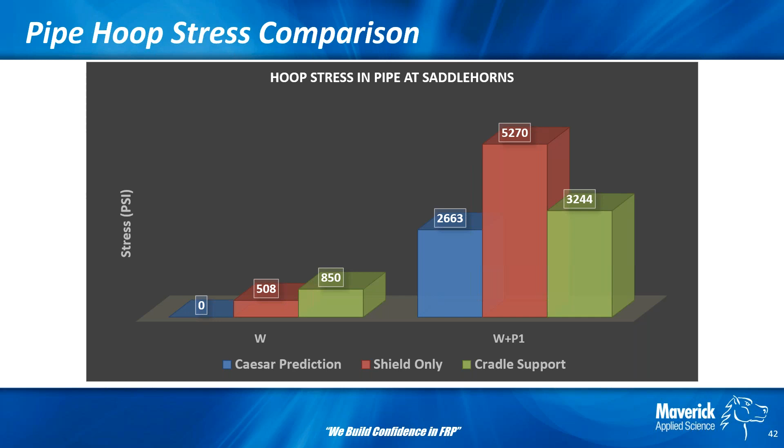So do you trust the pipe stress results just blindly? If you're putting bad supports in your system, you're invalidating the pipe stress completely. The job of supports should not be to add stress to the pipe - it needs to keep the pipe round. Finally, the purpose of pipe supports is to ensure proper restraint and system functionality. The bottom line: it has to restrain the pipe how the pipe stress asks it to.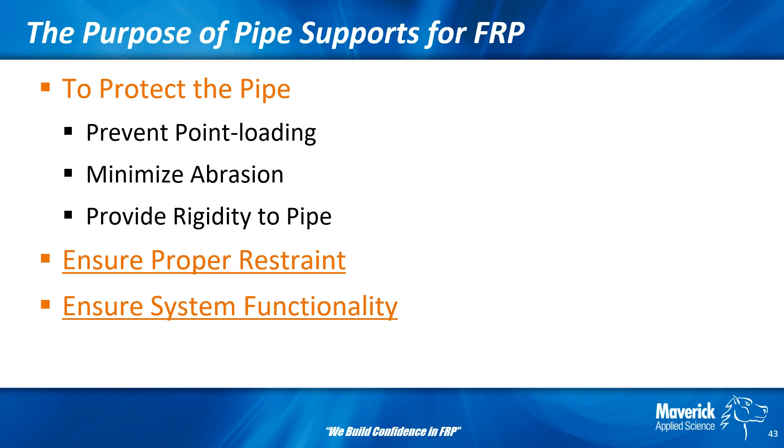You need to make sure shear collars are installed and engaged properly. You need to make sure the gaps are set, because the gaps are critical to system functionality. The system needs to operate reliably, predictably, and as intended.

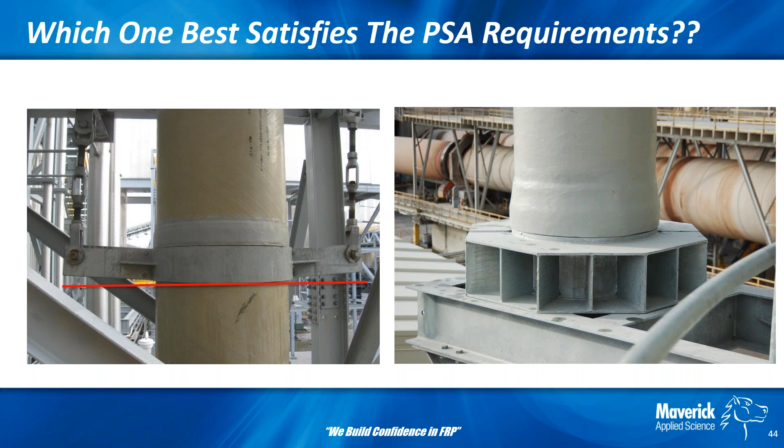So which one of these supports best satisfies the pipe stress requirements? The one that deflects an inch when it's loaded, or the one that is very stiff, with a good shear collar on top, not deflecting at all, not pinching the pipe? Aside from maybe pinching the pipe because it's rotating there, how do you think the elbows feel next to this pipe at the bottom of that rise, about deflecting 1 inch more than it was supposed to? I'd venture a guess it's a lot higher stress than what was predicted. Wouldn't be surprised to see some failures in that pipe over time.

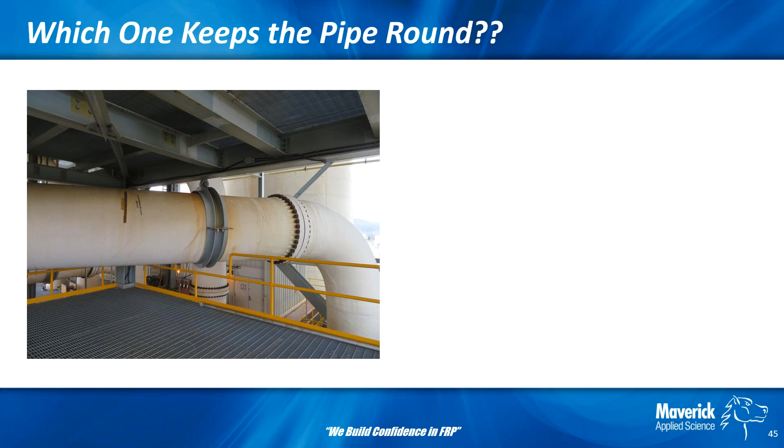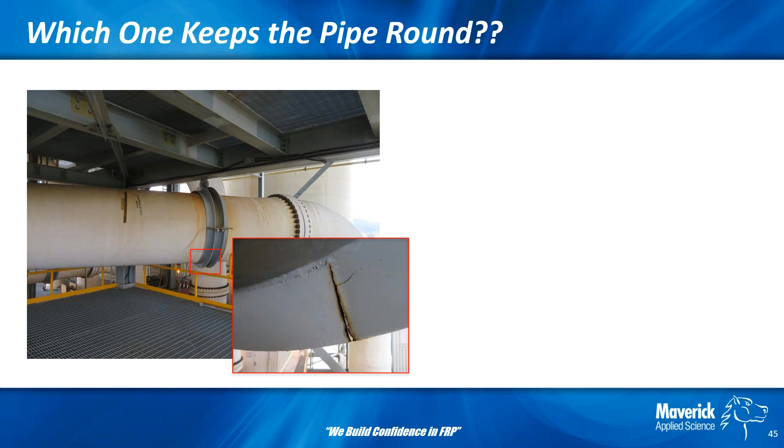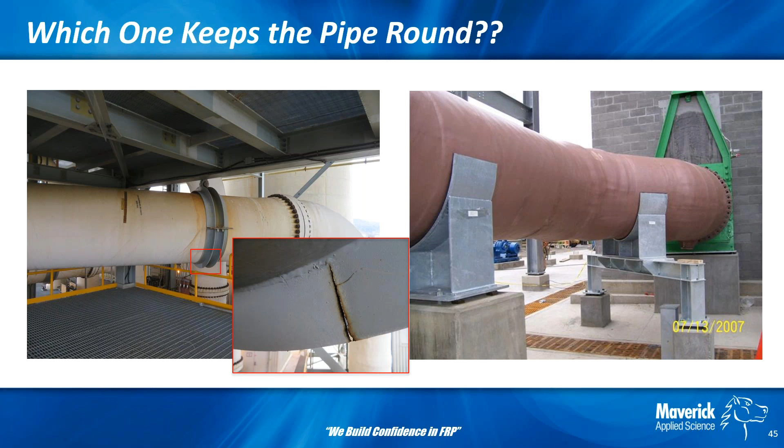Which one of these will keep the pipe round? The support on the left looks okay from afar. You have stiffeners or rings around that clamp there. There are some failures on this one because it was not the proper support for the loads. It ended up failing the steel, which is very hard to do. What is it doing to the pipe as it's trying to oval now? The steel isn't doing much, so the clamp is just flexing in there and pinching the pipe. Or you could have good, solid, stiff, wide, robust supports, keeping it round.

So you might be saying, I have good supports, they're wide, they're stiff. Well again, keep in mind pipe stress is static. It does not know your system dynamics. So my rule of thumb is 3 consecutive hangers is not good, because hangers have 0 friction. I would say don't do more than 2 hangers in a row, it just does not work well. You need that little friction from a base support to prevent vibration and moving back and forth.

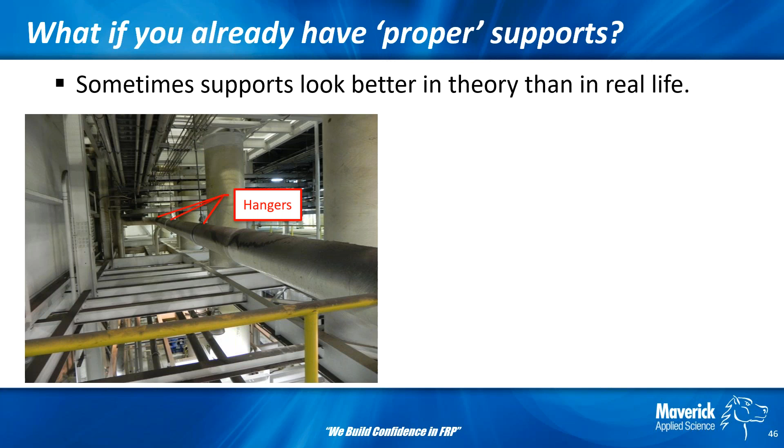You say here, okay, I got guides, U-bolts. I don't have shields, which I should, but at least I have a guide - that's what pipe stress said I needed. Well, look at that trapeze hanger, I would say that's not very stiff. So guides with poor structures are not going to guide the pipe, they're just going to sway.

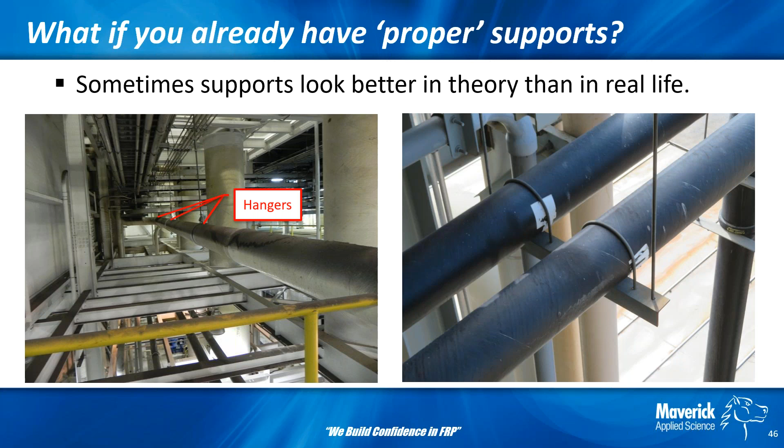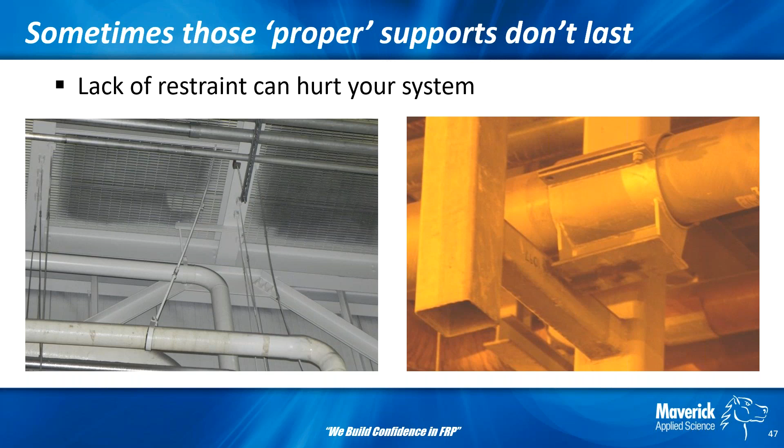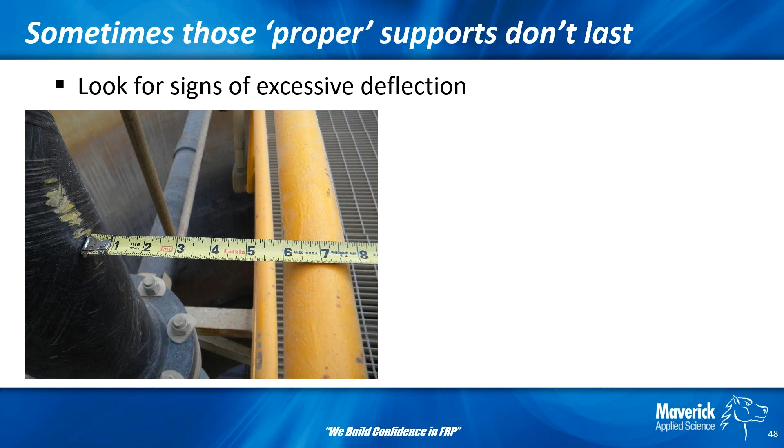So look for signs of excessive deflection. Movement is okay as long as it's predictable and not constant, not fatiguing your system. Large displacements and unpredicted movement will fatigue that system, which to an FRP guy usually means shorter life because of our non-ductile material. If you see paint 6 inches away from a hand railing, I would say you have at least 6 inches of deflection in that system. If you busted up your steel because of a surge event, I would say you don't have enough anchors in your system.

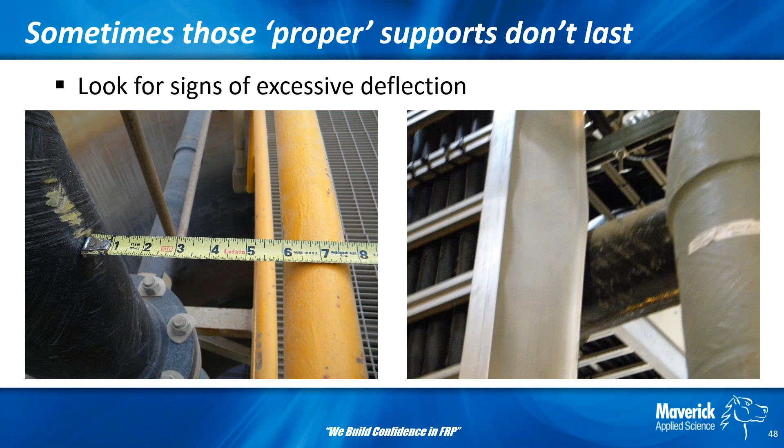So kind of wrapping it up here, communication is key. You will not get what you need unless it's correctly designed, defined, communicated. That goes for support types, loads, reinforcements. You need to talk with the tank manufacturer, you need to understand what you're connecting to. You cannot just design a pipe system in isolation, you can't just stay within your box. You have to understand the full picture - what the steel looks like, what kind of supports are going to be used, what you're connecting to. Properties vary depending on construction method and from manufacturer to manufacturer.

We showed several slides with that, I hope that made sense to you guys. So get good data, don't assume. NM2 and 3 can certainly help, but it's not everything. It's going to be conservative, and you have other manufacturers who don't want you to use NM3 values - they want you to use theirs because they've done extensive testing.

Understand that steel principles cannot be directly applied to FRP. If nothing else, buy NM2 and read it, read it for the design section. It is so much better than B31.1 and B31.3 for our North American people. Just read it, you will learn so much about analyzing FRP that has been tribal knowledge in the past. Understand what pipe stress software does for you and what it doesn't. This isn't just an FRP versus steel issue - it is more pronounced with FRP because of our failure mode, but the stresses, they still tell you the same stress for a steel system as they do for an FRP system.

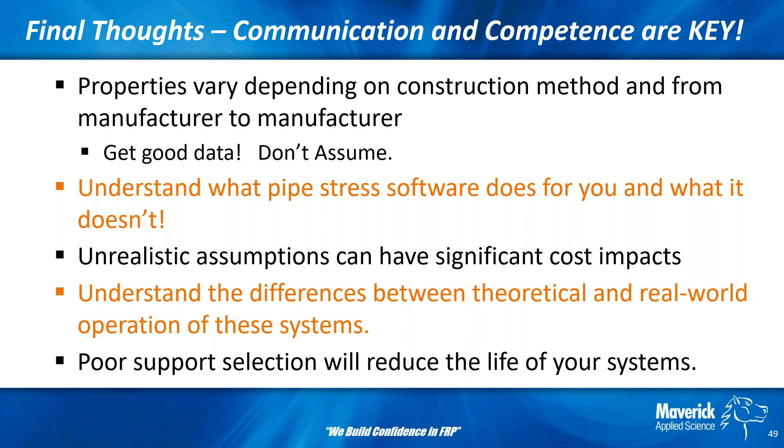With that, that's all I have.